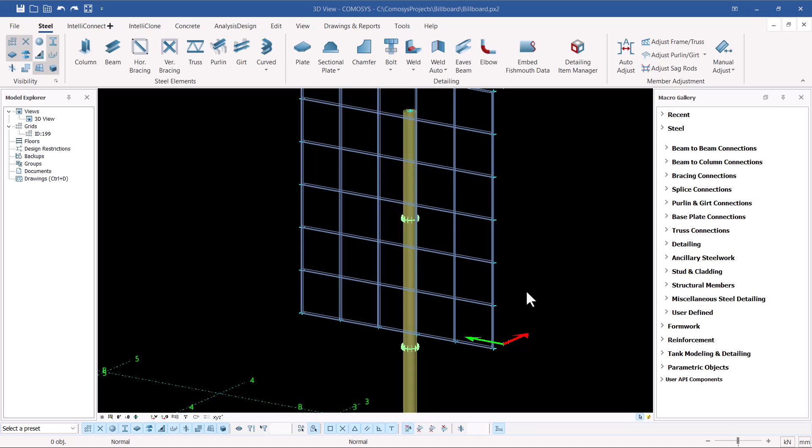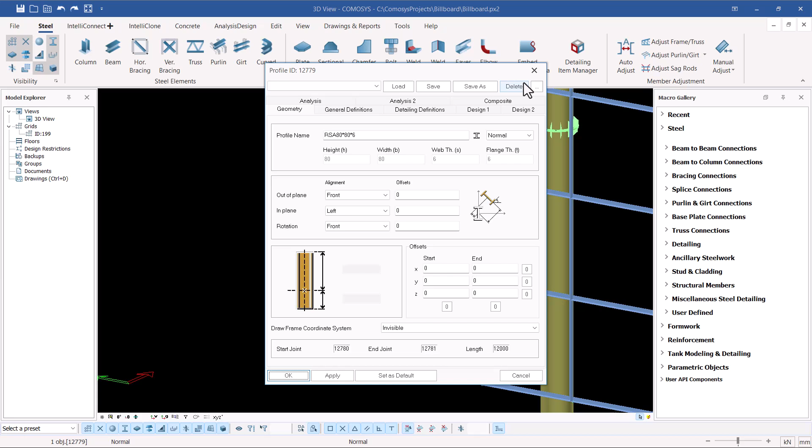Now, if you take a look on the screen here, we want to optimize it further so that we use less steel, but our frame is very strong. Now, if I double click on this member here, you'll be able to see this is 80 by 80 by 6 millimeter. Let me just give it some time. Though we can leave it at that, you can also use 75 by 75 by 6 millimeter. So let me just get rid of that.

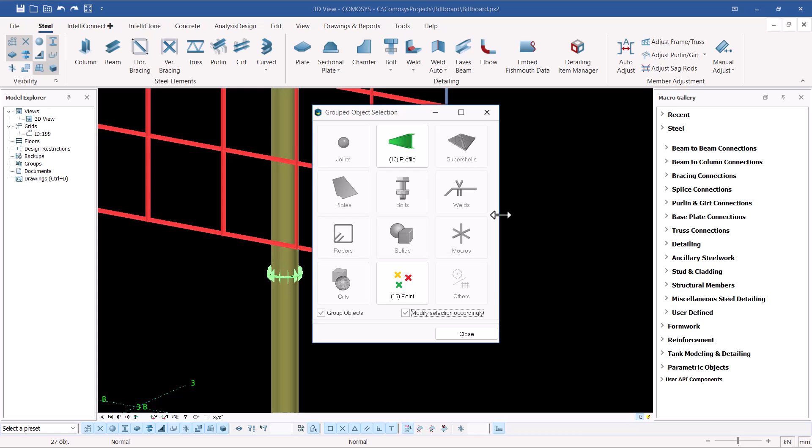Now, if I come here, I'll first of all change this to 75 by 75, everything here. Let me just select everything, select all that, so that I change this to 75 by 75. Now, if I come to profile here and just double click on that, let me just give some time to load the steel catalog. So I'll come here and click on that section here, and then I'll come to 75 by 75.

If you don't get it, we go to another family. So here it seems we don't have 75 by 75. So I'll come all the way down, check if I have 75 by 75. We don't have 75 by 75. Let me just come back and check it from here. Do we have it here? I think we have 75 by 75. No, we don't have it there, and we can check a different family. And if I minimize that,

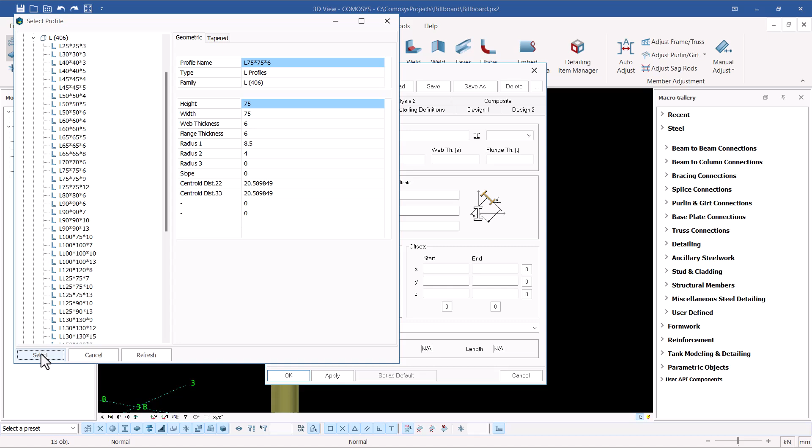and I come somewhere here and check that, it seems we have it here, 75 by 75 by 6 millimeter thickness. Then I'll go ahead and click apply here. And once I give it an okay, everything changes to 75 by 75, but our point is still intact.

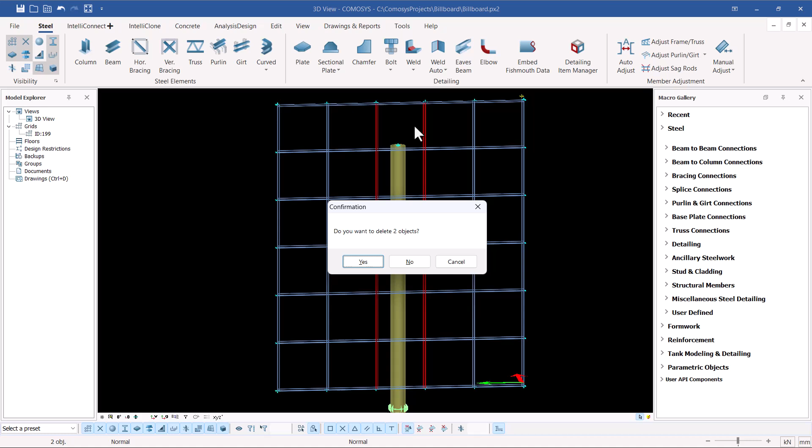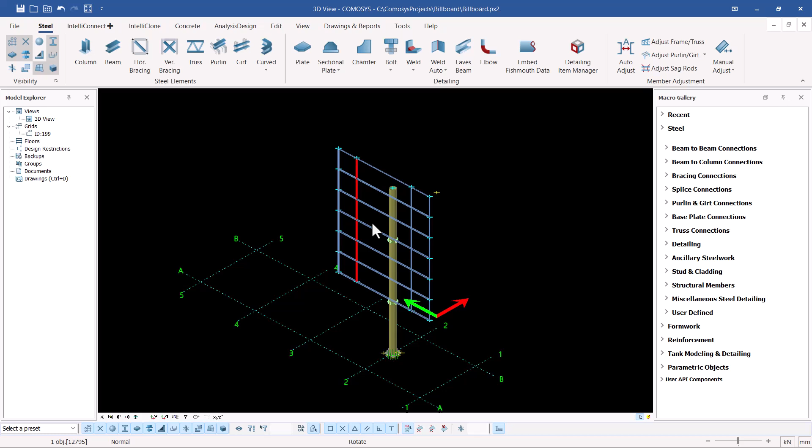Now, I'm going to get rid of the middle frames here because you don't need these ones here. We can offset this inward by approximately 500 to make it 2.5 meters. So I can just go ahead on the direction of the y-axis. I have to check the orientation first, because I don't want to just populate it without taking into account the location of the XYZ plane.

Now once I've selected that, I'll right click and come to special copy here, and I'll give it an okay. Then I'll reset everything, then come to the axis. So I just feed in here 500 to make it 2.5, and I'll prefix this dimension with a negative sign because we are moving against the y-axis. So once I've done so, I'll go ahead and delete the previous one.

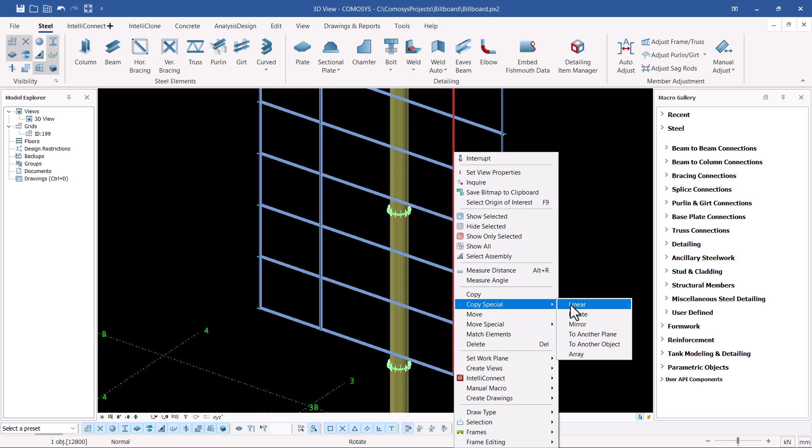So I'm going to do the same thing here. Let me just select that, right click and come to special copy here and pick linear. So under linear, on the same direction y-axis, I'm going to remove the negative sign because we're moving in the positive direction of the y-axis. So if I do that, I'll be able to close, then delete the initial one there.

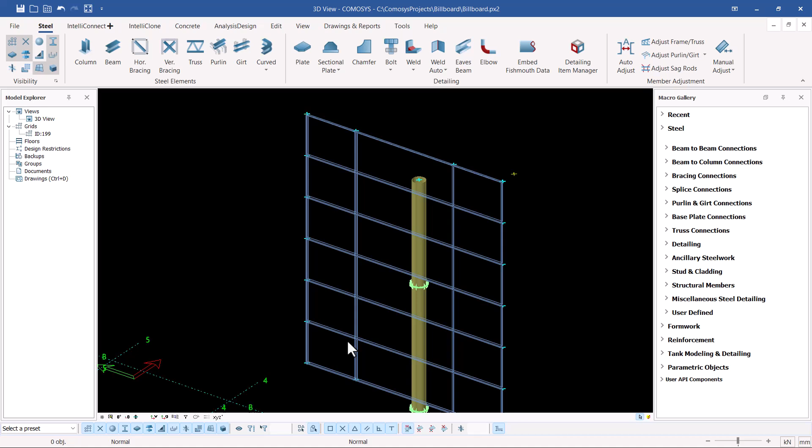So I'm going to just take into account, prior to that, we have our brackets that will be holding our frame. We'll have one at this point, jump ahead and have one at that point, then have one at the utmost top here.

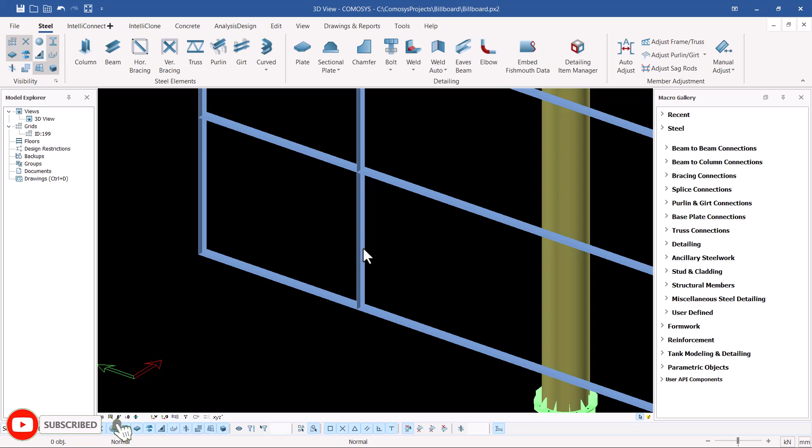So what I'm going to do, I'm going to just come here and check the orientation: if we begin connecting or bolting together this steel frame, will it be harder to do, or in other words, will it be inconvenient because of the location and the position of our steel members? So if you take a look here, this one can frame into this by maybe a plate connection, or maybe a brace connection right there. That is not an issue.

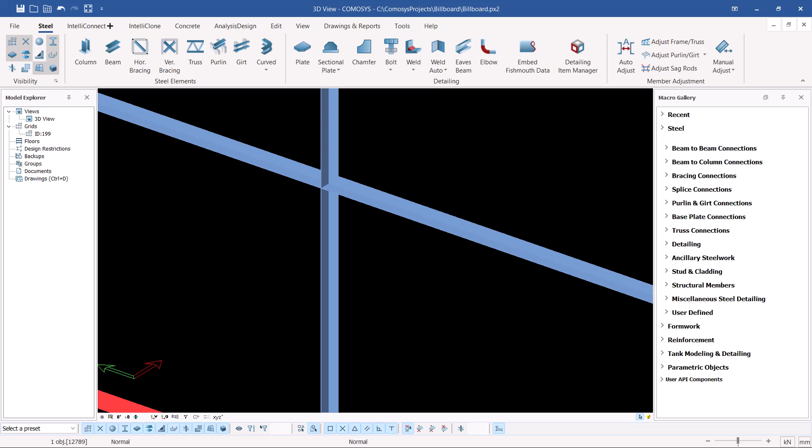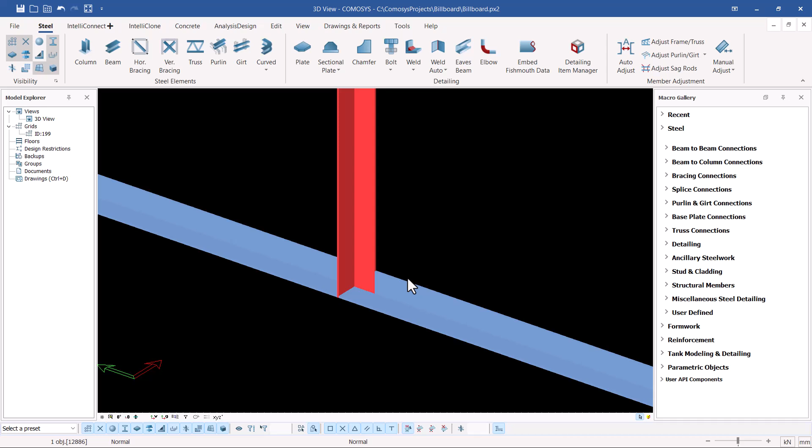Then this framing to this will be somehow hectic, so it has to move to the other end, and we'll place a washer in between them and bolt them together from that side. So we have to take this back. There's another way that should not inconvenience how this frames to this. So we have to take this back behind it. So I'll press Control Q, and take it and rotate it like that, and give it a W, so that has gone back.

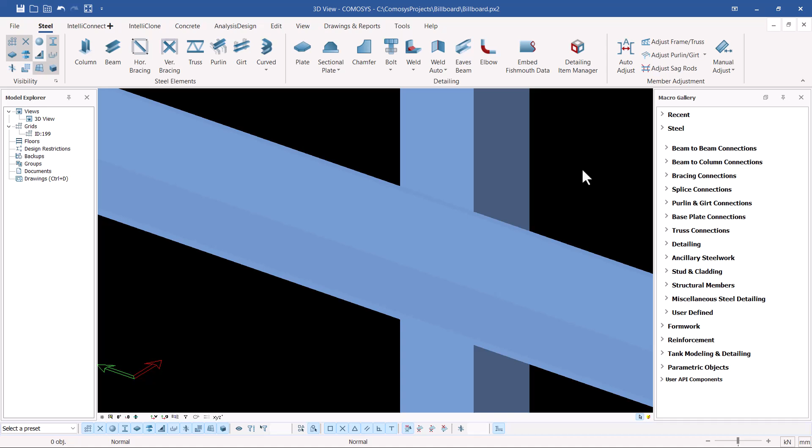So in between we can place a washer or a plate, maybe of 6 millimeter, then we bolt it together like that. Same here, and same on the other end. Let me press Control D, and we can bolt another one there, and bolt another by placing a washer inside there. So this the same way, and also we have to reorient this one also. I'll press Control Q and Control W, and that's all.

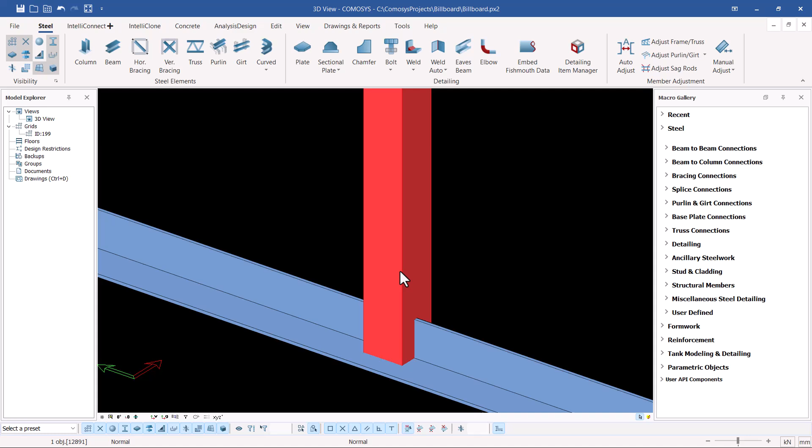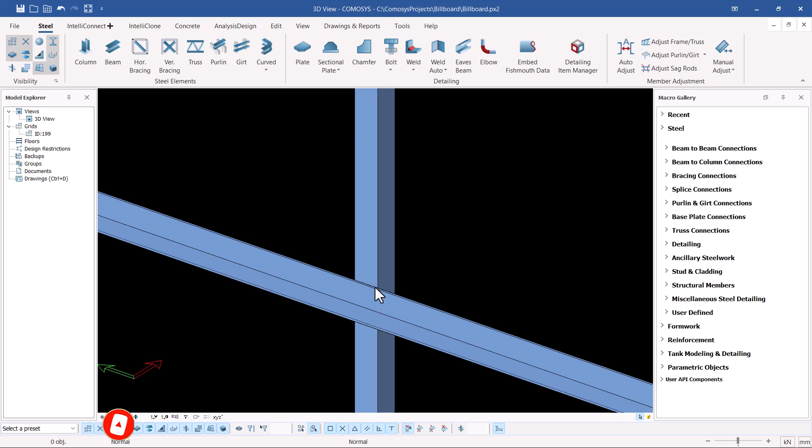Now if I come to the top here, I want to trim this to this level. I don't need it to go all the way to the top there. It is unnecessary. So what I'm going to do, I'm going to trim it off, cut it off at this surface, at this end here. So I'm going to select it, and then come to edit. Once I come to edit, I'll come to frame edit, and come to break frame.

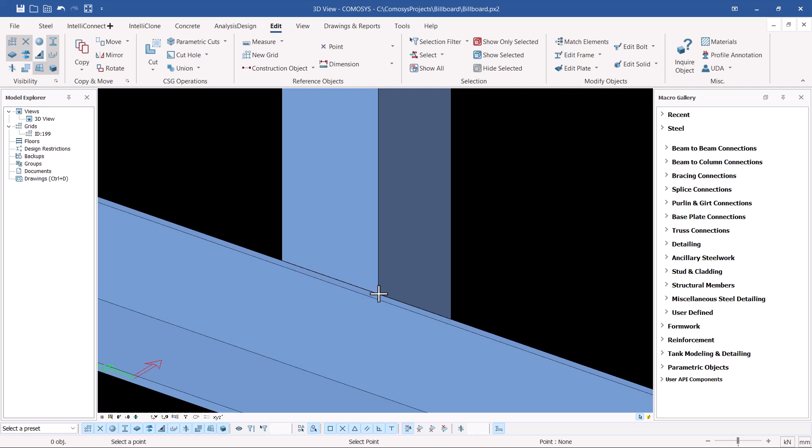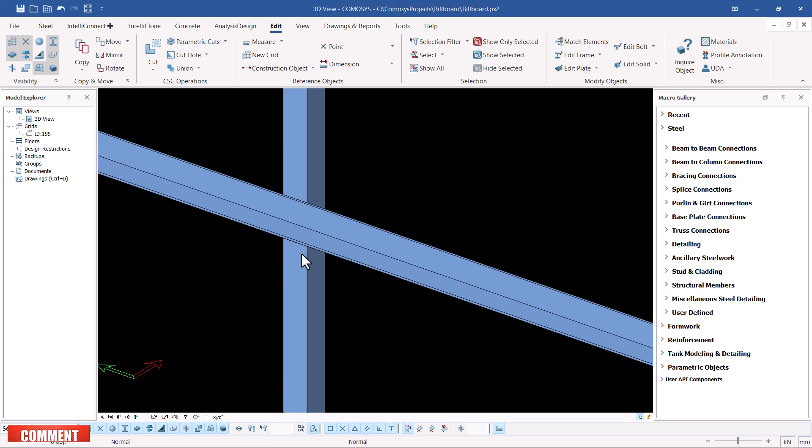So to break the frame, I'll press Control and just mouse over on the location I intend to break it from, and then click on that spot. So there we are. If I select on that, you'll be able to see I've actually trimmed it off. So I can go ahead and delete that. And also I can mirror this, or I can just do a similar thing on the other end, though I'll mirror it. So let me just turn that round.

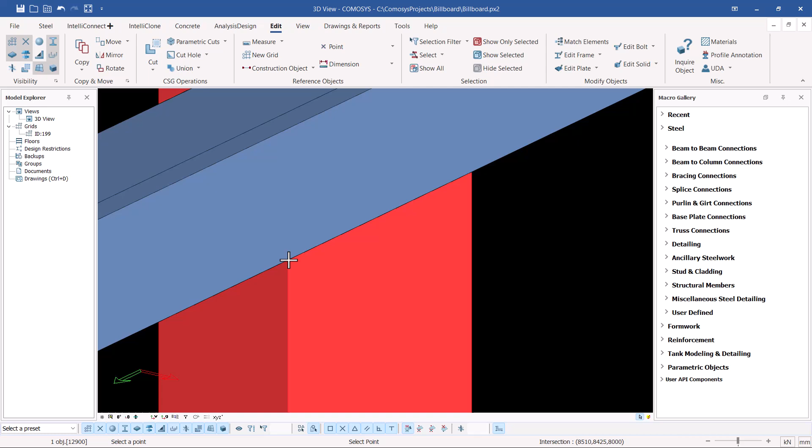Let me just turn that round and do the same thing here. I'll come to break frame from edit frame. Then we'll be able to get this tool here. I'll break frame, then pick the frame you want to break, press Control, then we can snap on that location right there accurately. Just give it some time to pick the point, then we'll pick on that spot. So the frame has been picked, and we can go ahead and delete it.

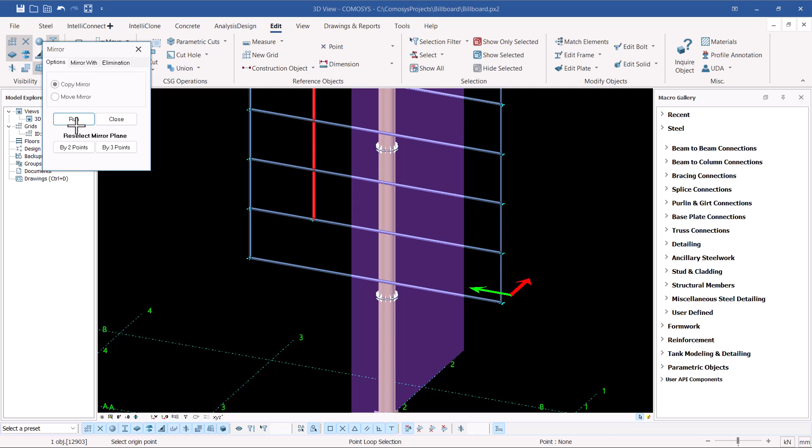So I'll right click and click interrupt, then I can be able to turn that round, and we have this in place. So I can always just go to delete that. Then I'll select on that, right click and come to special copy, and let me check whether I still have my mirror in place. Exactly, I have my mirror in place, so I just go ahead and click run and close that. So I have this in place.

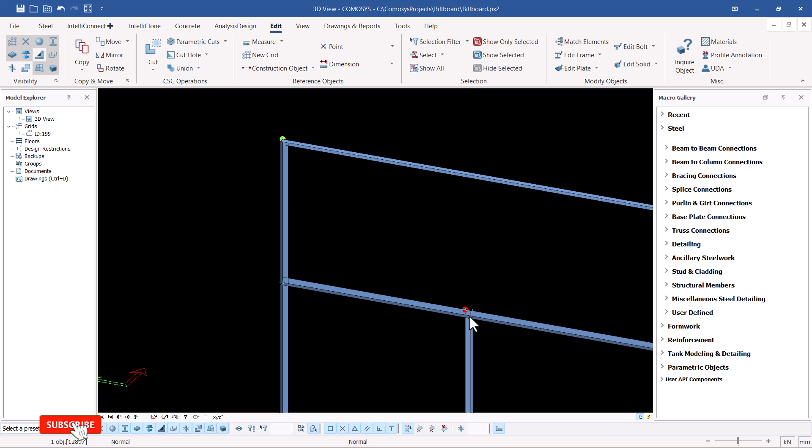So what I'm going to do, I'm going to create a member and join it with that. So let me just enable the joints so that I'll be able to see the joints here. These are the joints that when you try to create a connection, the system will be able to detect that there's a joint. This is a joint, this is a joint, this is a joint. So there's a joint here. So we want to create another member from this to brace it to this.

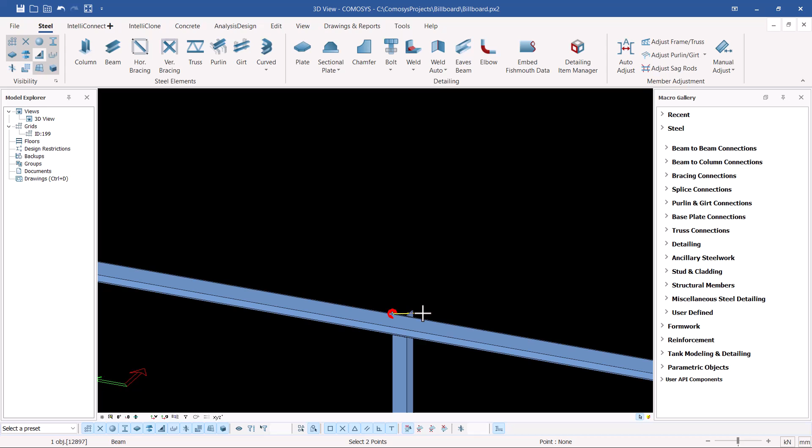So what I'm going to do, I'm going to go to steel, then come to beam, then I'll just snap on the joint right there. Just snap on the joint and go all the way to this joint right there, and just snap right there. So we have a member right there. So you have to give it an orientation that will not inconvenience the connection when we begin creating connections.

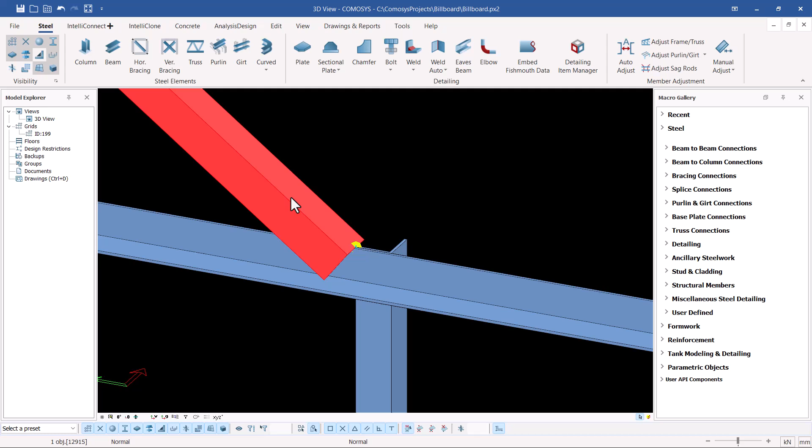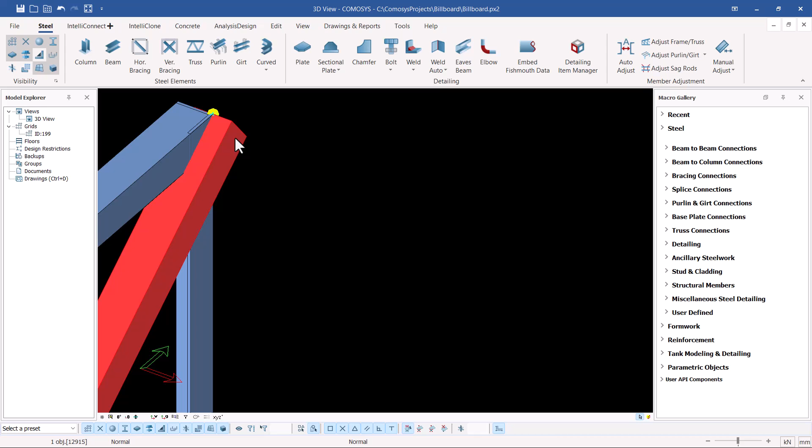So let me just select on that, then press Control Q, so we can turn that round into a position that will help us or make our connection a little bit easier. So let me just turn that round, and if I pick on that, press Control W and press Control W, and let me just press E, and that is okay. So we have that in place.

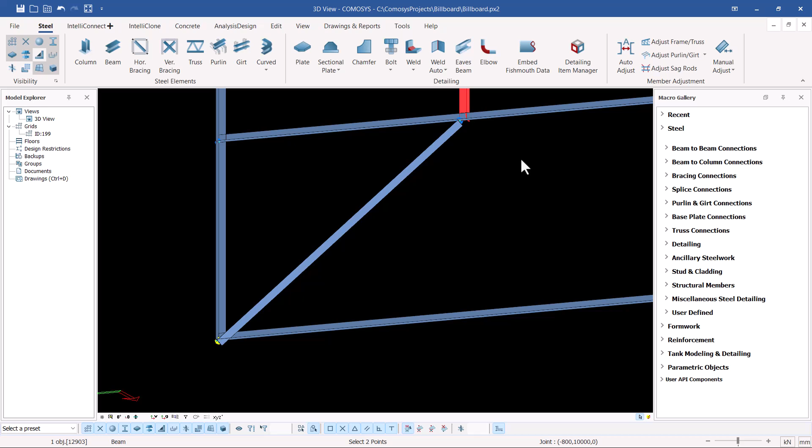So I can always come here and do the same thing at the bottom end here. Then the rest I will just have to mirror and create a similar thing like that. So I'll come to that spot and snap on that spot and snap on that joint right there. So we have that in place. So let's first of all check which member size is this, because we didn't assign it as a default member. So I think it's still 80 by 80, but the rest are 75 by 75.

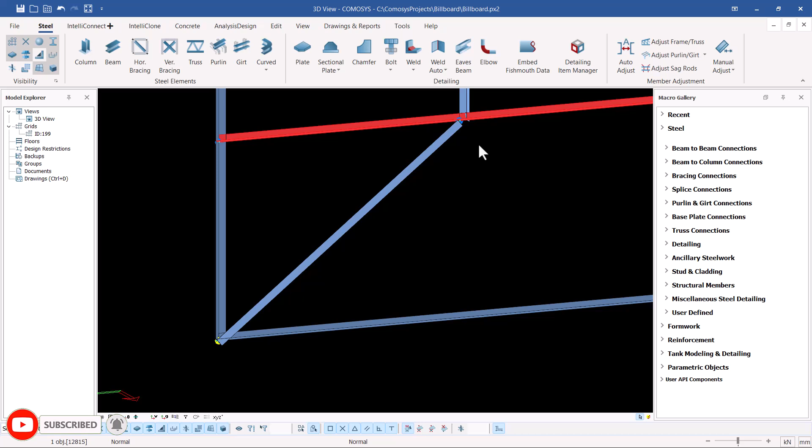So what we're going to do, we are going to double click it. So this is 75 by 75. So what I'm going to do, I'm going to select on this, then press Control and double click on the last one. Then when the dialog box comes here, we will be able to change it to 75 by 75, or we can just type it here, 75 by 75.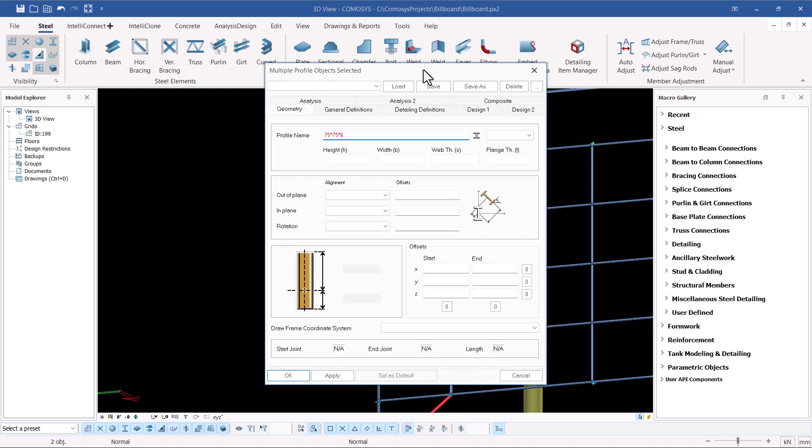75 by 75 by 6 mm. So that's it. So if we come here, we can make it a default member. So if we click apply and give it an OK. So if you come back here and double click on it once again, we'll be able to see that we have it as a default member.

So let me just give it some time. So this is still 75 by 75, which should not be the right thing we are doing. Now, let me just double click here. So the moment I double click there, I want just to copy this and paste it whenever I select on this. Let me just select that, right click and come to copy and close this. So the moment I pick on that, I'll be able to select on this, then select on this, then double click on this.

So I'll wait for the dialog box to come, then I'll just paste this L shape here, then just click apply, then set as a default, just click apply. So once I've done so, and come here, double click on that once again, and just give it some time to load everything. So this is 75 by 75. Now I want to make it a default member. So whenever I create a member, I'll be defaulting on 75 by 75.

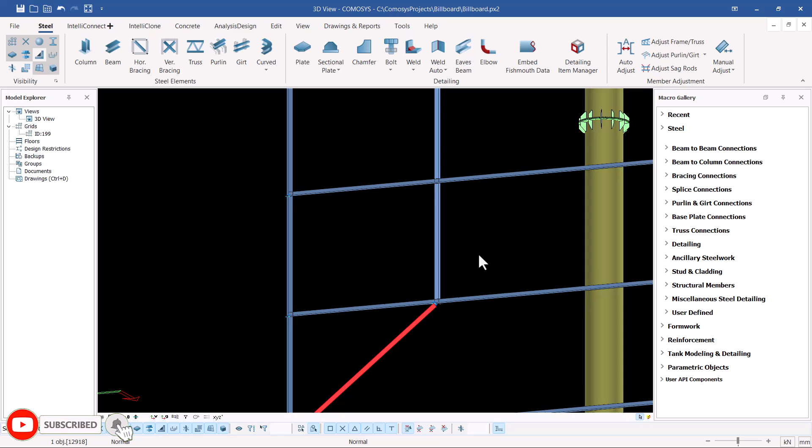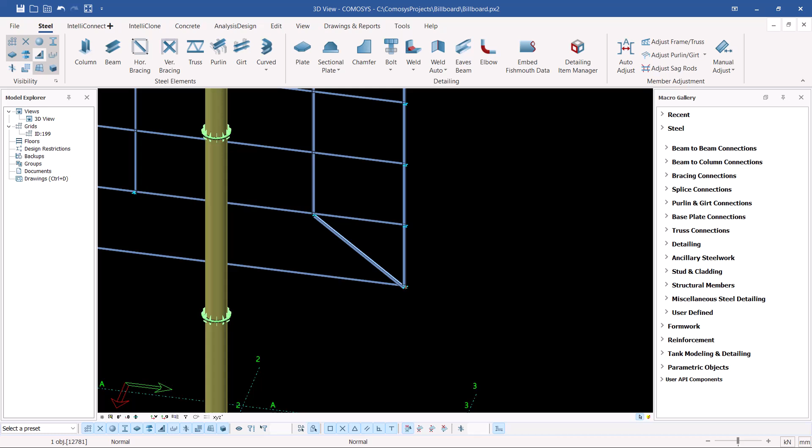So another thing is here, as we did previously, we should reorient this member so that when we start creating connection, it will not be inconveniencing us or making the process of creating connection here much hectic. So if I turn that around like that, I'll be able to see I have these in place. So I can always rotate this. The rotation is okay. Let me just rotate that, click on that spot, rotate that.

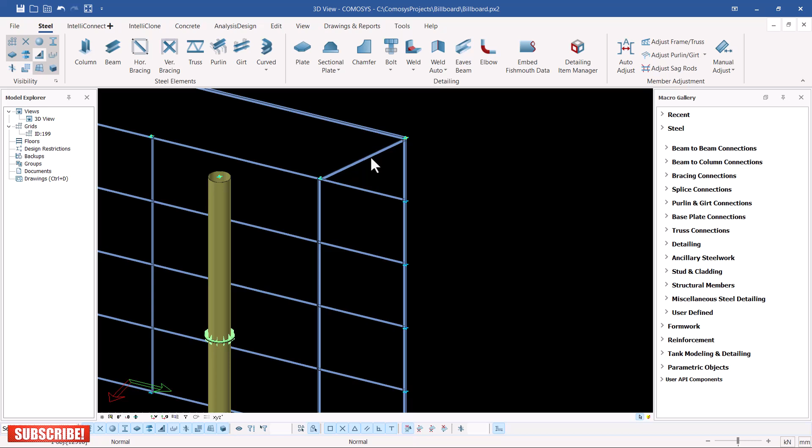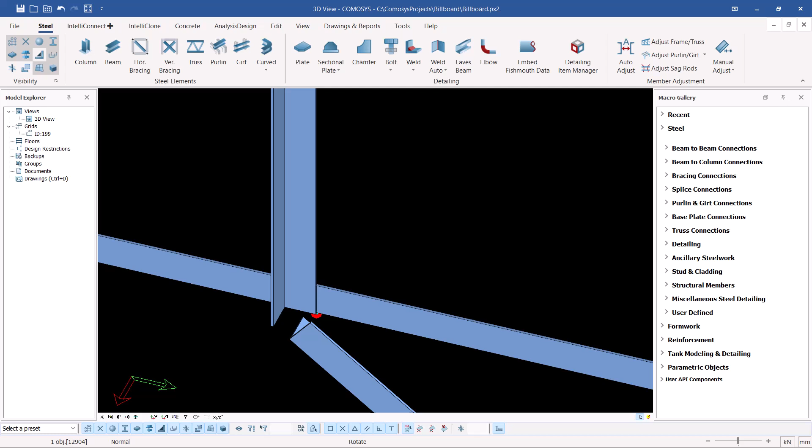First of all, let me check whether this should be similar to this, or instead of doing a guesswork right there, we can either mirror this, but I would prefer we do it the same way as we did it here. We just select on that, press Control, and we have that in place, and we can always select on that, then press Control W, turn on that, then select on that once again and press Control E once again, and we have that in place. So that is an exact location.

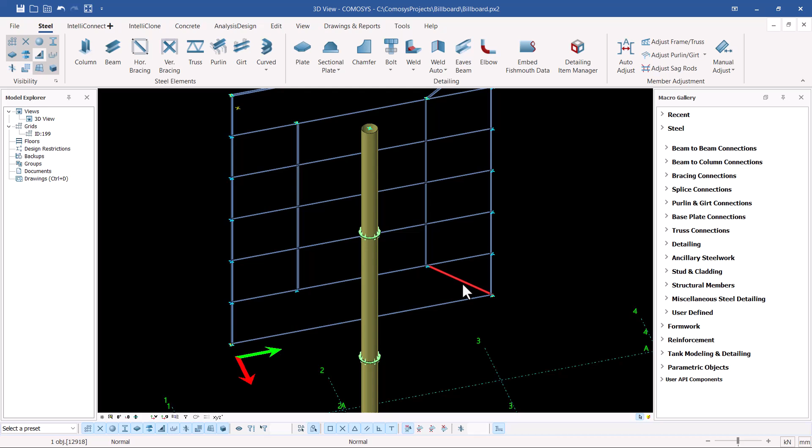So what I'm going to do, I'm going to just select on that, then right click and come to special copy, then pick on mirror. My mirror line is still in place, and you can go ahead and click run. So the moment you run on that, we have the member in place.

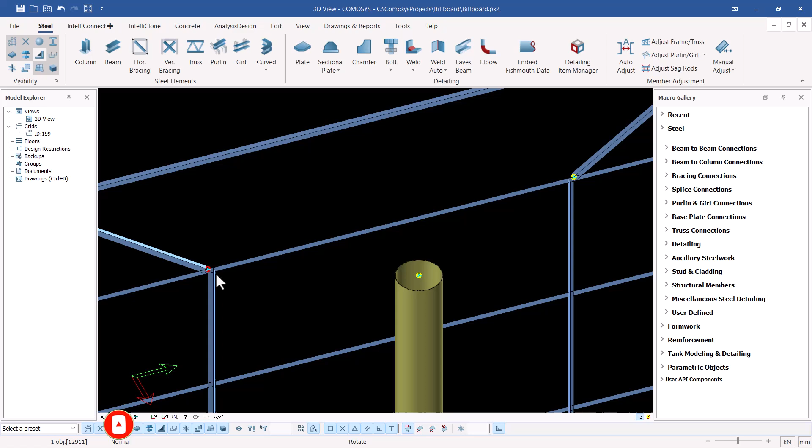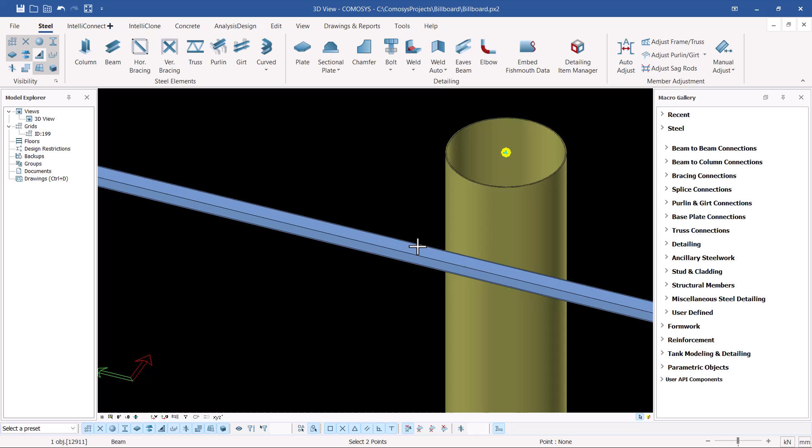So another thing we want to do is just to maybe place another member here, just to prevent this frame from sagging or wobbling. We can come at the midpoint here, just mouse over at the midpoint there, and if we want to frame another one here, let's just mouse over on that spot. We can frame another one here, and just give it some time, and we can frame another member right there.

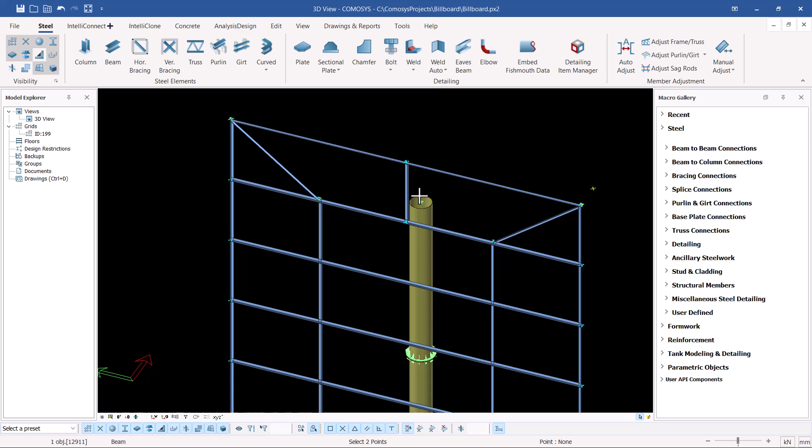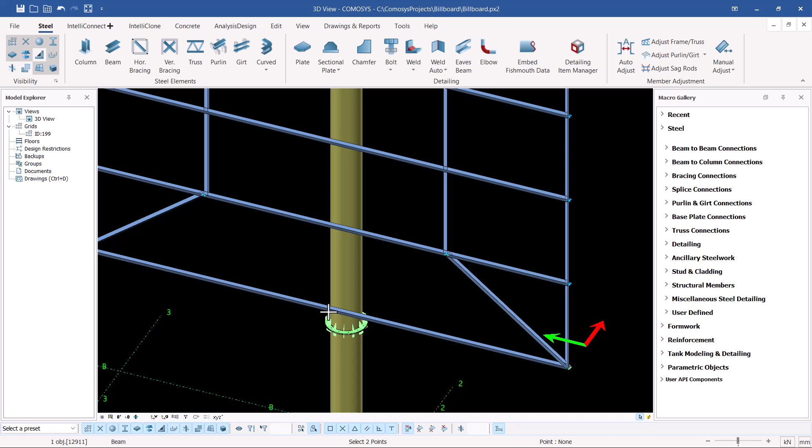We can also come to the bottom end here, and we frame from this point, frame it from the bottom end here. Let me just bring it closer. Just mouse over this spot here so that you get the midpoint. Just give some time to snap on that spot, and we have to snap on this particular point here. So the moment I do that, I'll be able to create another member right there. So you can see we've framed on that, and we've framed here.

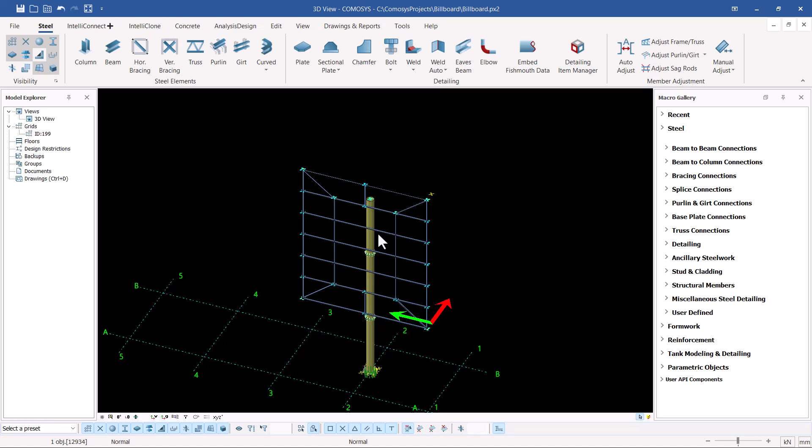So we have this a little bit rigid and very strong, with lesser steel. Now, this is how you can define or create a frame. So the supporting brackets we'll do later on, and I'll also show you how we can create connection of all these frames.